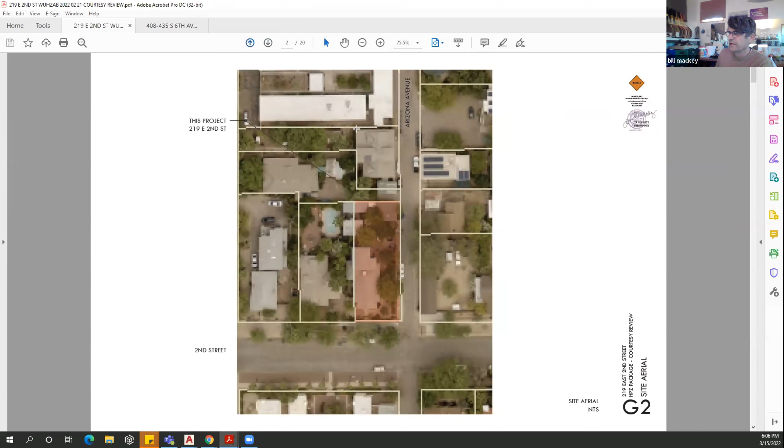But most important is what's going on in Arizona Avenue for this project, because the proposal will be facing Arizona Ave, just like many of the contributing and non-contributing structures facing Arizona Ave.

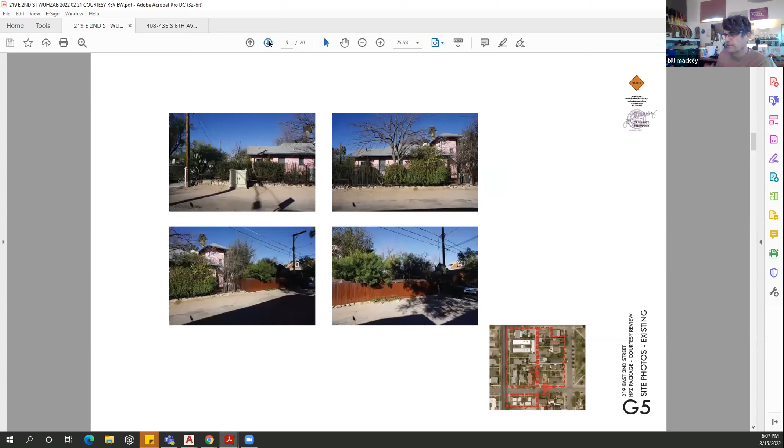Here's a photograph of the front of the house from 2nd Street. And then here's a photograph of it from the southeast, looking northwest and west. So you can see the front of the house here, and then the two-story addition that was done. When was that done, Jim?

1997, it did go through historic review. We were really, actually, historic review improved our design. So again, I appreciate this process and appreciate those of you who serve on this board. So the addition is actually vintage, it's like 25 years, right? Or so. Good point, so pushing 30.

So, and then here's the rusted metal fence that extends from kind of halfway in the property to the north. And in the shadows is a small one-story accessory dwelling unit. And that space there is where the Ramada will be located.

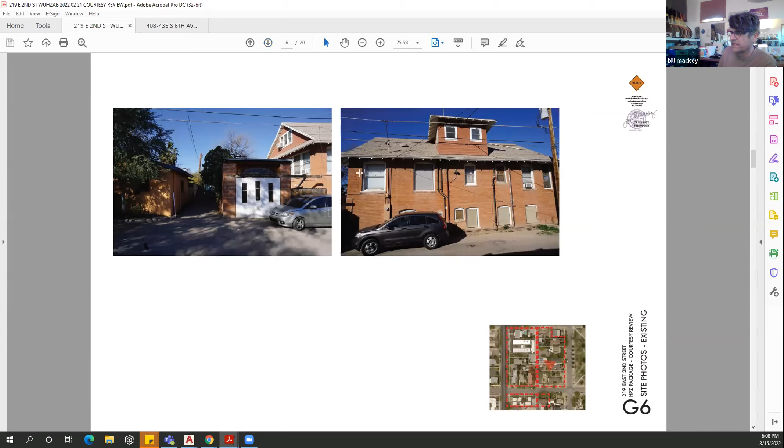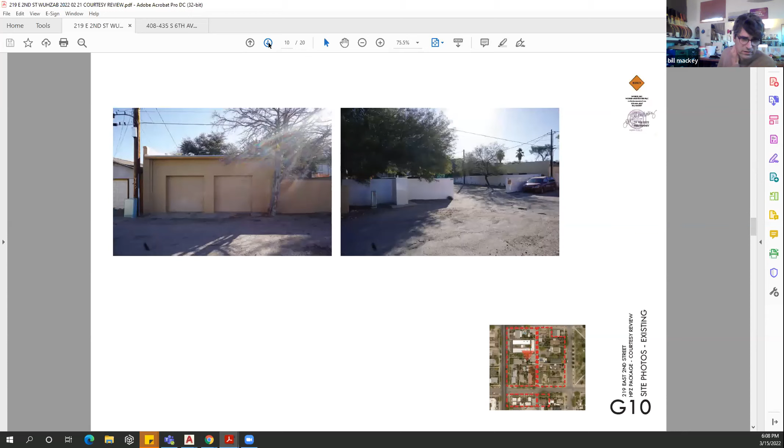And so then these are pictures of the development zone. There's a little garage building that's been modified. There's a two-story structure to the north. There's this carport, CMU and post and beam, low slung garage, and then a two-story building up at the corner. And then turning and facing east, we see a bunch of walls and garages. A lot of these are actually non-contributing, I believe, if we go back and look at the development zone. Right.

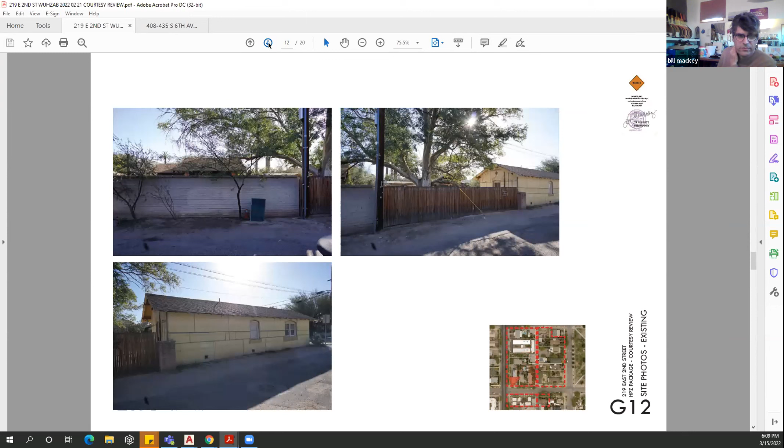And then there's the project I think you're going to be reviewing next, across Arizona Avenue from Jim's property. And then these are the houses and the properties that face Second Street within the development zone.

The property inventory, and this is the location from looking inside the property, looking north. Out here is Arizona Avenue, and this gravel area is where the proposed carport will be located. Behind that vegetation is the one-story accessory dwelling unit, and to the left is a one-story shed structure for working. In the back, you can see another one-story unit.

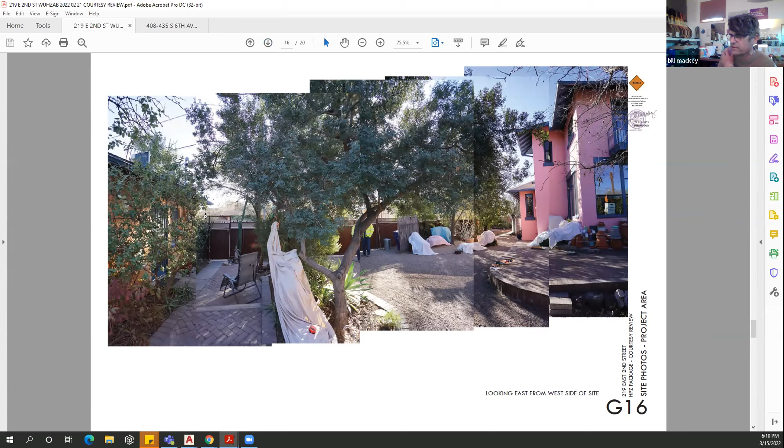This is looking west and south. The project area is located in this open gravel area. To the south is the landscaping, and south and west is the house - I'm sorry, I was looking east. To our left is the small accessory dwelling unit.

Here's the site plan, existing on the left, showing the location of the house and these accessory units. Right here will be the carport. We're going to modify a little bit of the brick patio that was built, and remove the existing gate and provide a new gate and a new overhead door for the Ramada.

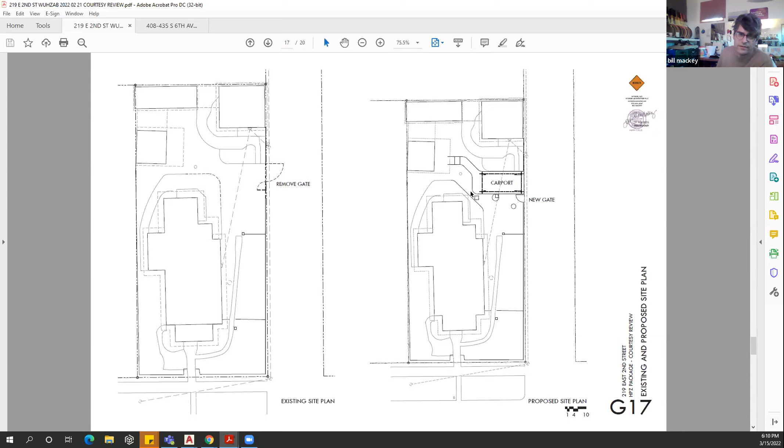This is a zoom in, and so there will be this Ramada here. It's about 20 feet by 8.5, 9 feet. There will be a pre-manufactured spiral stair on the south side of it. It'll be located 18 feet from the existing accessory building and about 5.5 feet from the main building.

The proposed elevations - it's steel. The columns will be, I think, a kind of tube - 4 square tubes, with beams in between them and the beams go on top. So it takes some of that arts and crafts porch architecture construction details and uses them with steel members instead of wood members.

You can see those are the columns, there's the beams. On top will be some joists with decking and a metal tube steel railing with horizontal pieces. We've been back and forth on whether it may be aircraft cable, may be 1/2-inch rod, may be 1/2-inch tube - not sure, but it'll be in the proportions shown here, maybe a 1x1 for the railing and a 1/2-inch or so for the pickets in a horizontal direction. The garage door will be similar to the fencing - a metal panel and frame with the metal panel inside the frame.

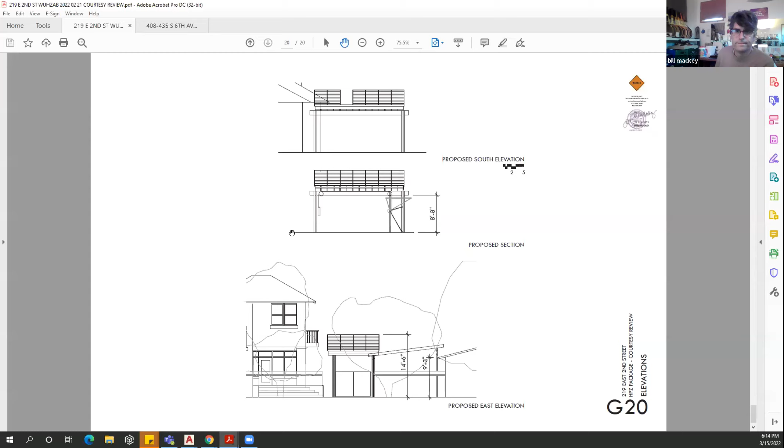Yeah. That's it. Okay, thank you very much. Let me get back on video again.

So you're coming to us for a courtesy review, I noticed on the agenda. I guess I'll open it up to the board. Any comments from board members?

I guess this is Damon. I just had one question, maybe two - I was curious what your thought process was on the horizontal features on the railing. Jim, you want to answer that, or you want me to answer it? Bill, you need to cue me when you want me to answer, and I will answer that.

Go for it, I've got 3 points I want to point out. One is, if you are on top of this Ramada, which is why we have the fence, we have the best views of the Tucson Mountains you can imagine. I have always tried to achieve those views in my buildings, and I have not succeeded until this opportunity. Likewise, we do have a view corridor of the Catalina Mountains, so we're looking forward to that.

With respect to the horizontal and vertical, quite frankly, we put in horizontal just to see whether or not you would comment and say you wanted it vertical. In my opinion, the last time I was before you was for a courtesy review for the iron fence, and I had horizontal panels and you guys recommended vertical, and I thought it was a good thing.

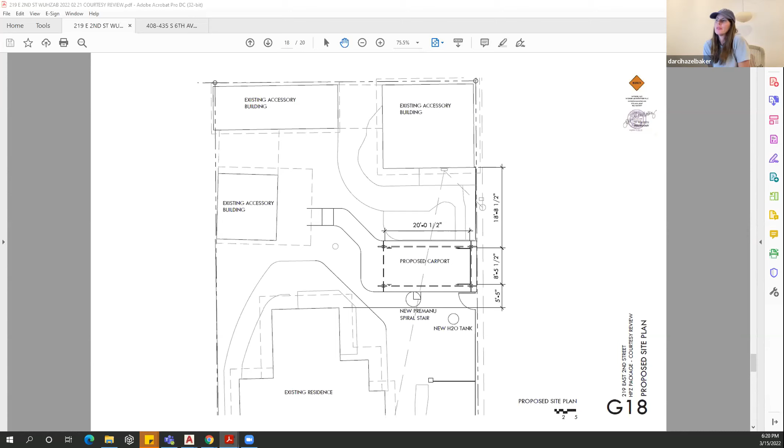I'm actually okay with the more horizontal, because I think, in reality, we're looking at this as a line drawing. I think those horizontals will probably fade to the background a little bit more, and it will just look like less verticals than if we were to go more vertical. I think vertical would probably be something that might be a little bit more prominent.

Also I kind of feel like it's a different thing, so in some ways I'm okay if it has a little bit of a different language, just because it's also a little bit higher up. You're never really going to see this thing like the east elevation, you'll never be far enough away to really look at it in this way. So I think if it was in a different place I'd probably have a different opinion, but since it's an alley with a short field of view, I'm okay with it.

Yeah, I'm kind of in the same place. And we have a lot of places where it doesn't matter. Bill, you're talking about those horizontals being, like you said, cable or some kind of steel cable. We have not made a final decision on what that material would be, but it would be less material than the vertical supports and the top horizontal support.

I'm not advocating that we do this, but I have a question for you, Bill. If you took those cables and oriented them vertically instead of horizontally, does that change the complexity of the project, or is it six of one, half dozen the other? It's probably more complex because you have to run more cables.

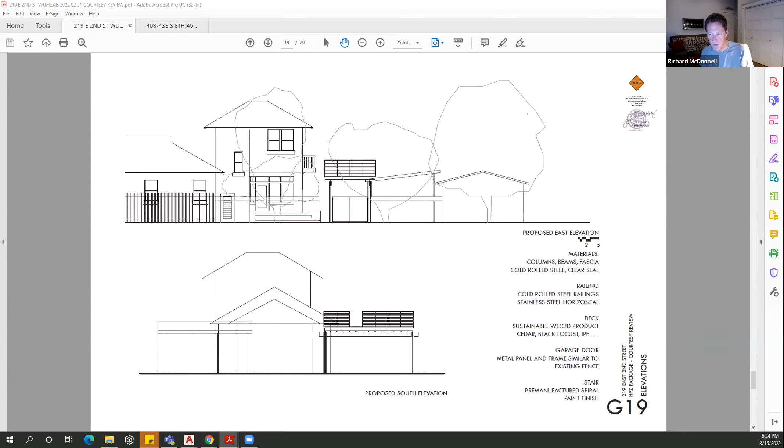One last call to the board for comment. Okay, hearing none, and given that it's a courtesy review, I think we're good.

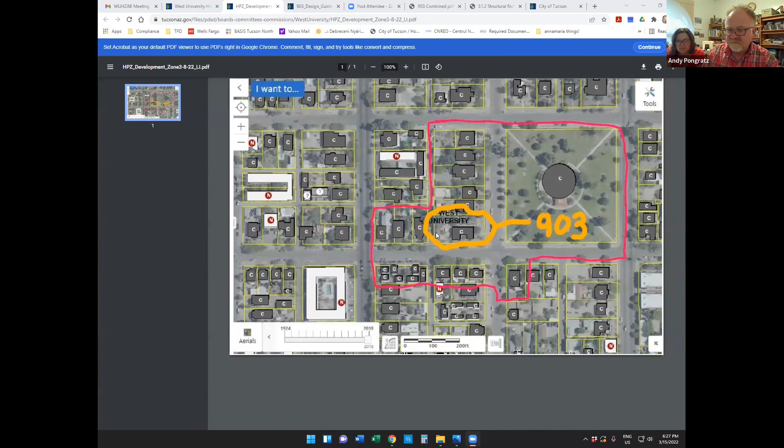Matt wanted me to go ahead and start with this, and then he wanted me to... I wonder if I can do that. How do I move it? Just move it.

It's just technology, guys. It's just amazing. There we go. All right. Okay.

Regarding the proposal, Michael asked me to tighten up the brief statement of the proposal, and we rewrote it, and it was available for you to look at. I think we had talked about things in detail before, and as Michael said, we should get into the meat and potatoes of what Matt has to present, because there are additions, decks, and ramadas that we need to talk about. Unless you want me to touch on anything else, Michael.

No, what you are presenting is this narrative, the board already has it. I don't think it would save us time going through this again, and the board already has it. If they have any specific question, they will ask you during the review. Okay, so just go straight to the plans. All right, we're right into the plans then.

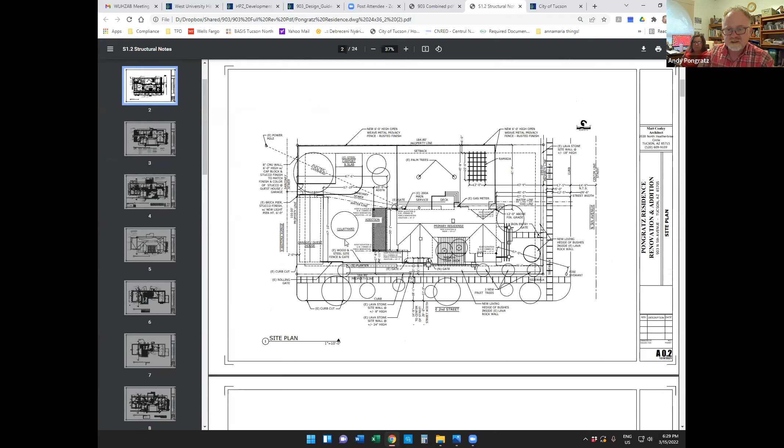So Matt, take it away. This is Matt Conley. So Andy, we can go to the next sheet, I think, if you want to do that.

So the proposal that we're putting together, what we're asking to do is to put an addition. Andy, since you've got control of the screen, identify where the addition is on the drawings. So the addition is on the west side of the existing home.

It's a craftsman style home, and the portion of the building we're removing, we have about 10 feet there, 12 feet if you look at the overhang we're adding to the west of the building. 6 feet of that is currently a sleeping porch or open screen porch in very poor repair. So we will be removing that and putting a full 10-foot addition on the west side of the house.

That addition will have a craft room, laundry room, an office, and a storage area off of the hall. There's a hall that runs down the center of the house, essentially below the ridge of the house, just above the primary residence.

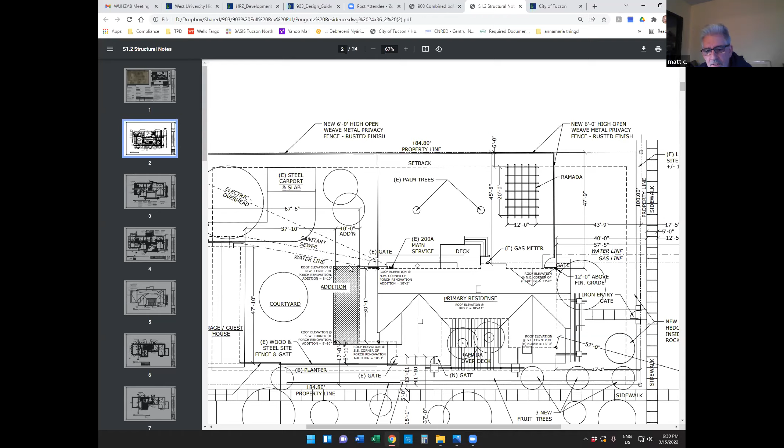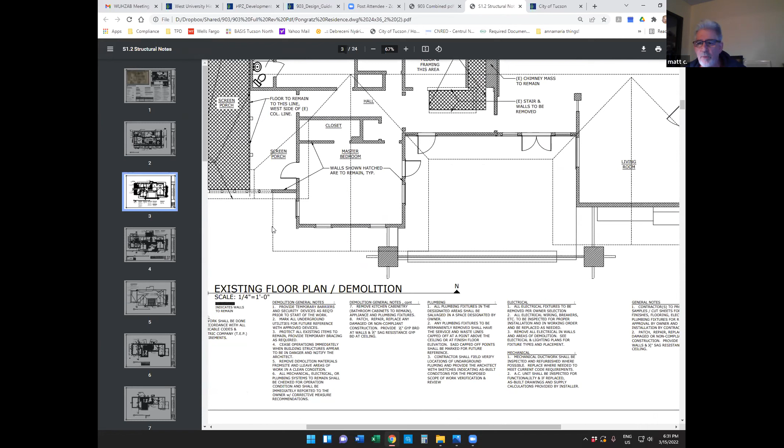That hall will continue to the new addition area you can see identified as screen porch, so we'll be taking that off. We're also opening up the stair down to the basement - there's a small basement area, and we're opening that up to get a code-worthy stair into the basement area.

So I guess, Andy, you can scroll to the next drawing. There we go. Okay, so the addition you can see here, it's going to be a crafts room. There's a bedroom in the corner and then an office we're putting in, kind of squeezed between the bedroom and the walk-in closet.

That was part of the screen porch, and that's the area that's going to be remaining. We're turning that into a larger walk-in closet for the master bedroom.

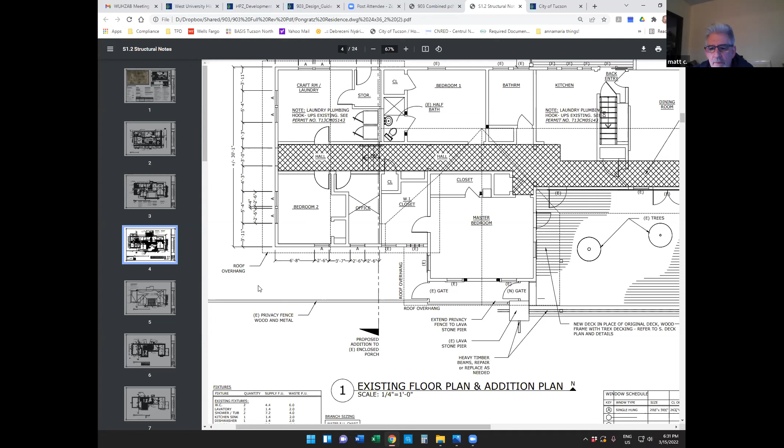The other thing, can you pan to the right a little bit? I guess my right. So the other thing we are proposing to do is reinstate a deck area and ramada that was cut between the two wings of the house, the master bedroom wing and the living room wing. There had been a porch there, and on some photographs Andy can show you later,

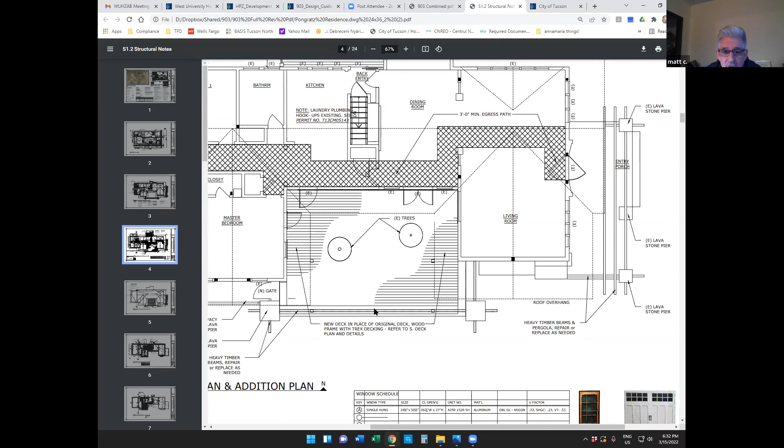you can still see the location where the ramada framing was attached to the east wall of the master bedroom, the east exterior wall of the master bedroom. And then we're putting a deck underneath that.

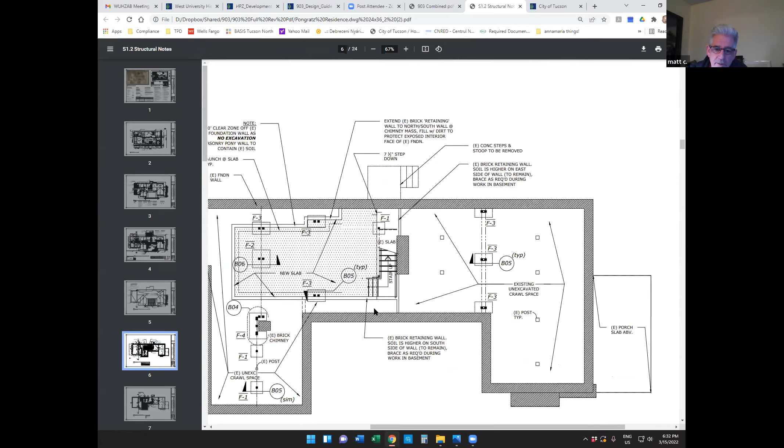There was a question at the last presentation Andy had done about this ramada. We have designed it so that the portion - Andy, go back please. Thank you. So the south portion of the ramada, you can see between the two large piers on the south side are lava stone piers that are existing, and you can still see the rafter tails coming out of the end of those from the original ramada that was there.

We will be restoring the wood that we can restore and replacing the wood that needs to be replaced in those locations. The second primary beam position as you move north - yes, thank you, Andy - is a beam spanning from wall to wall within that courtyard space or deck space to pick up a second beam.

And then we're going to tie frame on top of that beam between the two lava stone piers, because that was in fact the way it had been framed initially, so that it had the rafter tails that come out south of that primary beam. So it was really a matter of not bringing our ramada members into the roof finish itself, but rather tucking them underneath the eave and bringing them to the south wall of the house.

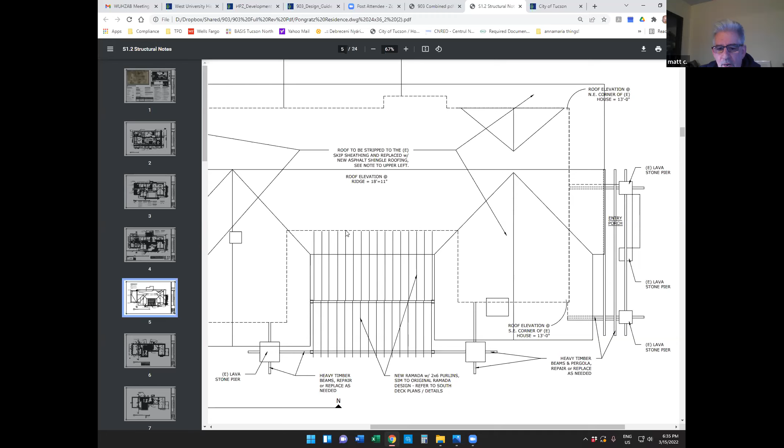And then, Andy, if you could pan north. We're also proposing to put a deck in off of the kitchen on the north face of the house that faces into the side yard of the house, which opens up to Fifth.

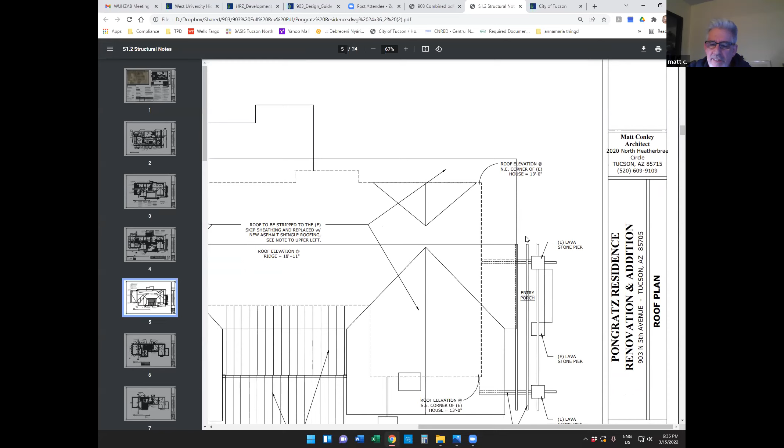Would you like me to go to elevations? No, not quite yet. You'll also see at the entry that we're going to be refurbishing the beams and that sort of ramada entry cover as well. That is a reasonably intact portion of the house, and I think with some minor repairs, we'll be able to get that taken care of without having to replace all of the wood members in that case.

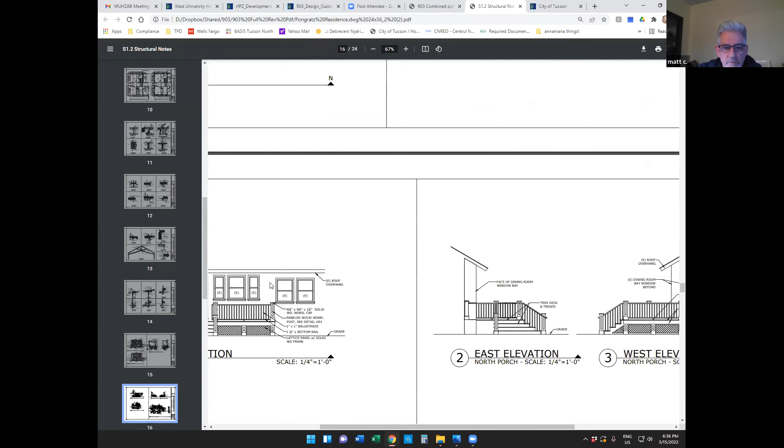Let's see. Yeah, Andy, why don't you go ahead and go to the elevations. Thank you. Scroll to your left, Andy.

So this is the deck here that's off of the kitchen. And it provides an outdoor seating place off of the kitchen, a place for the family to gather when they're having activities in their, essentially their side yard is their backyard. The yard to the west of the property, west of the addition, a lot of that is vehicular and space between the garage guest house.

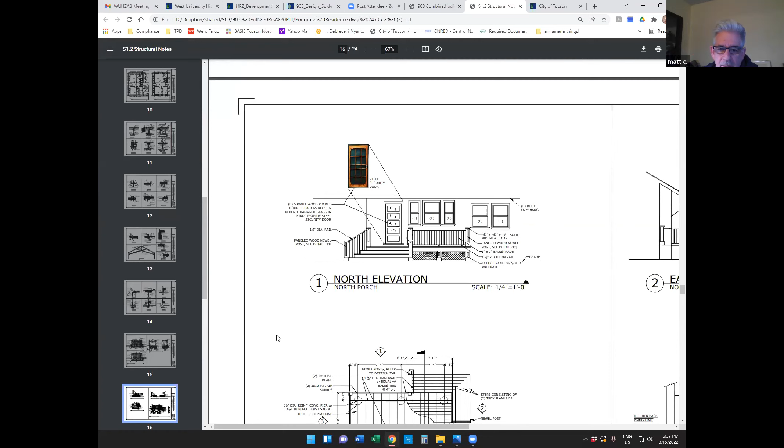So we've designed this in a style that is consistent with the arts and crafts style of the architecture itself. The steps open down both to the north and to the east off of the porch. And this porch is floating off of the house.

So we have a paired series of concrete piers that support that porch so that we don't have to bring any kind of structural members into and bear upon the existing lava stone foundation wall.

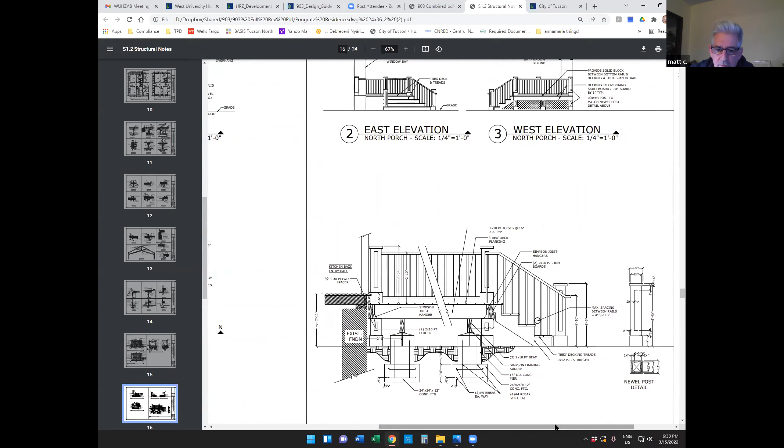So Matt, could you go- or Andy, I guess, go back to your right? All the way. Yep, there you go. Thank you. Right there, that's perfect. So, Mr. McDonald, I'm trying to- you've got a lot of things on this particular drawing that are all labeled E.

And the windows, let me just start with the windows. The windows, you're just refurbishing the existing windows, right? You're not changing anything in the existing house?

We have been fortunate enough to be able to refurbish all of the windows. Andy has replaced glass in many places in those windows, but he's looked for the kind of leaded glass that is consistent with the time frame of the house. So they are being refurbished, or where trim needs to be replaced, it's being replaced in kind. So the detailing will not be altered.

The door is a wooden door that has glass panels in it, and it too is being refurbished so that we're not buying a new door. We are proposing to put a steel security door on that door location.

There are two other locations that Andy and Andrea would like to put a security door. We have later in the presentation a better photograph of that. And Andy has actually propped an example of that door up into those three locations, so you can see literally what it would look like in the three entry places that we're proposing to use that.

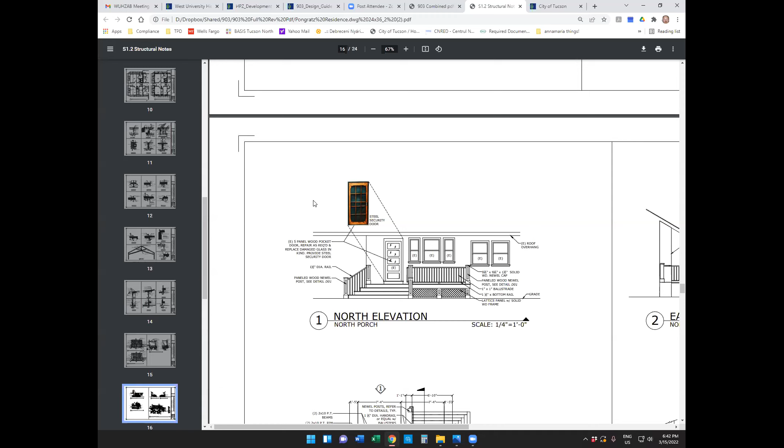So Matt, let's go back to the door. The one you're showing on the diagram here, it looks like 5 straight panels, but this brown one you're showing here, are they divided panels? Andy, you can speak more accurately to that. What exactly was the question, Matt? Whether the panels on the security door - it's divided into 6 lights above, an intermediate set of smaller lights, and then 6 below - are those true divided? In other words, does the sticking work?

Is there a panel in between each one of those individually, or is it actually a wooden overlay? It's kind of the neatest thing - it's actually real wood on top of a security door. And the neat thing is, Matt, should we go to the pictures real quick, just so we can see?

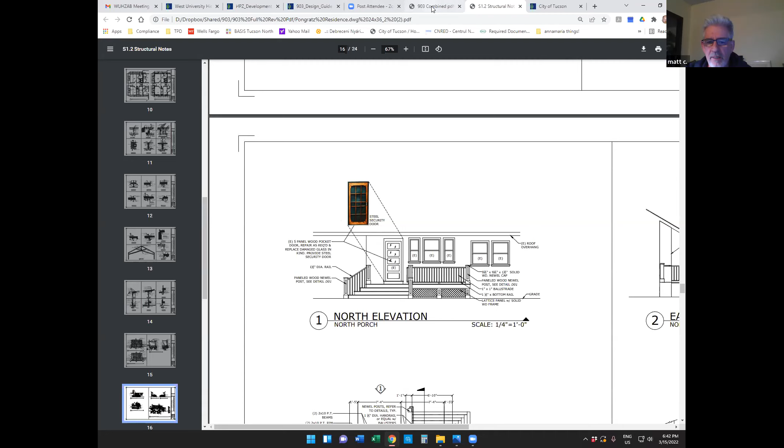Sure. And Andy, what Michael is asking is, with the security screen behind the door, behind the framing, is that a single panel of screening, or are they individual panels within each one of the openings? So we're talking about the actual security screening portion of the door - is that a single panel behind? It is, yes, that's actually just a regular security door.

And what the company WoodGuard has done is they went ahead and put a wood overlay, and you can actually see from different pictures - it's really kind of neat, and something I think the board should see many times in the future to help folks protect their homes. You can see how the beautiful detail of the wood actually goes exactly with the existing house. It's just fantastic - I don't think there's anything that could have been any closer than this security door.

What is there though, is that glass? I can't tell from the image. It's actual screen. Okay, so the gray there is the actual security door. And Damon, you can actually see the molding around that fits right into the trim. All I did was take the screen door I had and propped it up.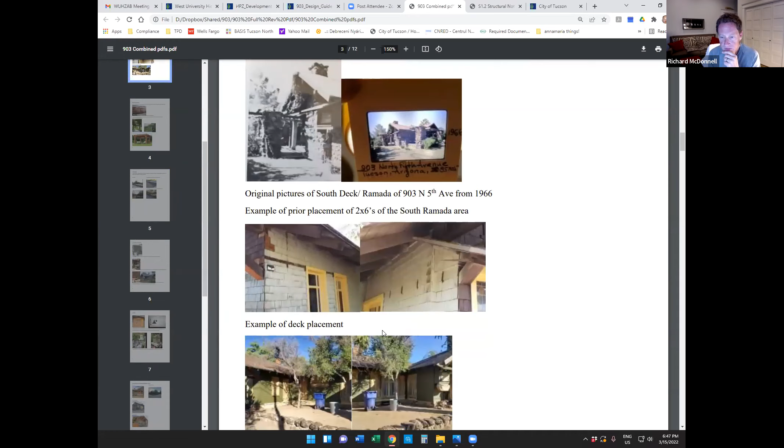So comments with respect to these doors, given that the wood we see in that picture is an overlay over a perforated screen - does that manufacturer allow different mullion designs? Do you know, Andy? Rick, I was very fortunate to find this on Craigslist and find the actual manufacturer. I looked on their website, and this is all they offer regarding an overlay in that kind of design. The exact measurement of the wood going across is the exact measurement of all the windows throughout the whole house, not just here. It's the exact same size - talking about the thickness of the mullions. Yeah, thickness, yes.

I was going to ask if you could, going back to the deck on the north side, walk through some of the details and talk about how you're connecting to the design of the rest of the house.

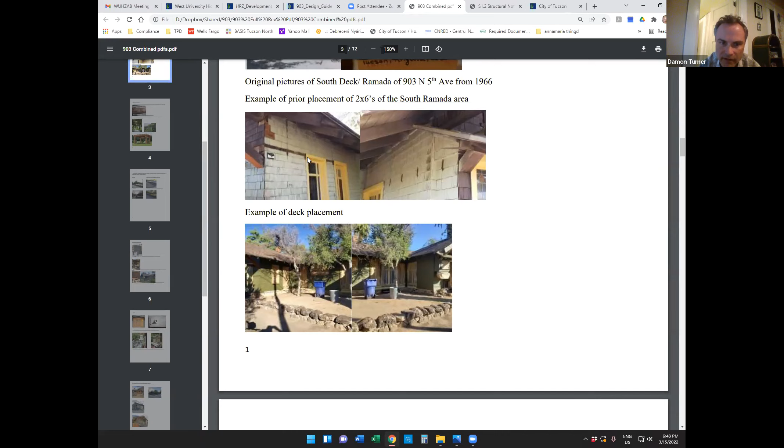I think if you go back to that elevation view - there you go. How are we connecting to the house? Not physically, I'm asking about architectural design. Aesthetically, architecturally - Andy, this is actually a section, so it shows the newel post. The detailing: we have a wood balustrade with a top wood handrail and a kick rail at the bottom. These are basically a flat recessed panel with a built-up plinth, and then the fascia across the skirt between the deck material and a lattice infill panel to close off the area underneath the deck, both from critters and so it's not an unsightly dirt area. But it's all wood. It will be stained and finished in keeping with the color palette we're working with on the outside of the house currently.

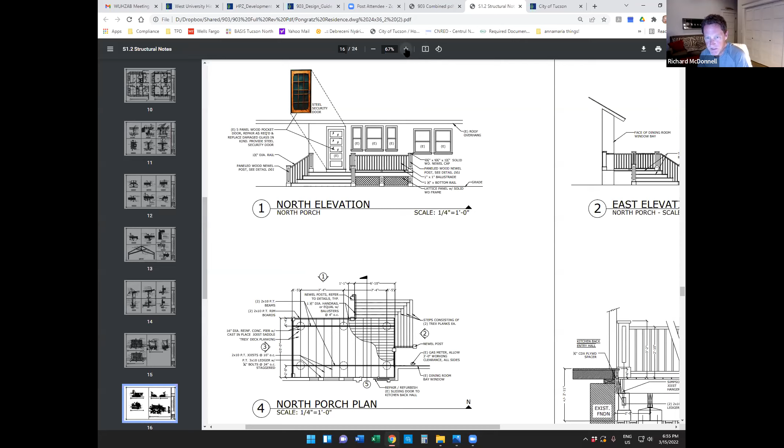Andy, we're not talking about whether putting a deck is a good idea or not, or whether having the functionality you're looking at is fine. It's just that the specific detailing of things like the posts needs to be consistent with either the intention of the house or the intention of the neighborhood, the specific development zone around your house. It's not that we don't want you to have a deck. It's that if you do have the deck, we want it to look like something in the development zone.

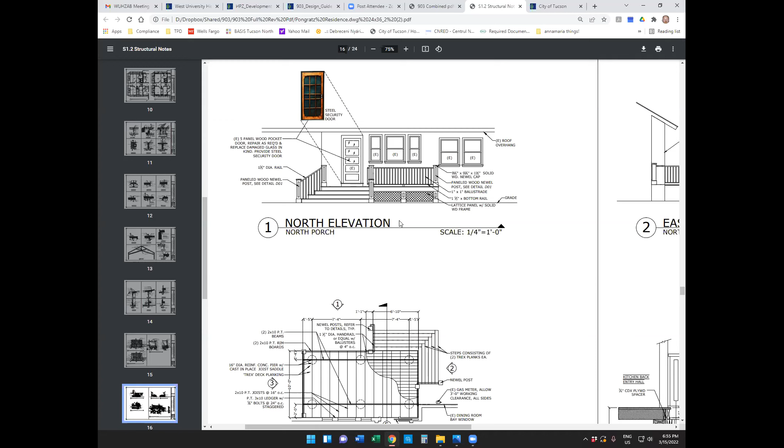I think all the other decks that I've seen are just very, very simple. The very few that have been around. Right, but that's actually part of the intention. So Matt, I'm kind of looking to you a little bit too. Do you follow what we're asking? I do, yes. And so within that context...

Let's see, I think we could go ahead and just square up and not have a recessed panel there. We can just have a solid panel going across. Right, we were talking about a home in Savannah, Georgia, that would make a lot of sense, but it's not. I think what we're asking is, is it really consistent with the aesthetic we see in the development zone for these kinds of homes? We're not questioning the utility of the deck.

So following that thinking, would replacing... because somehow we've got to support the deck itself, I'm wondering if replacing the piers with stone, while still maintaining the gap, and a wood framing across the top, would be more acceptable within the context of the development zone. Given that question, I'll make a point of driving through all of the blocks to see kind of what the general context is for other decks.

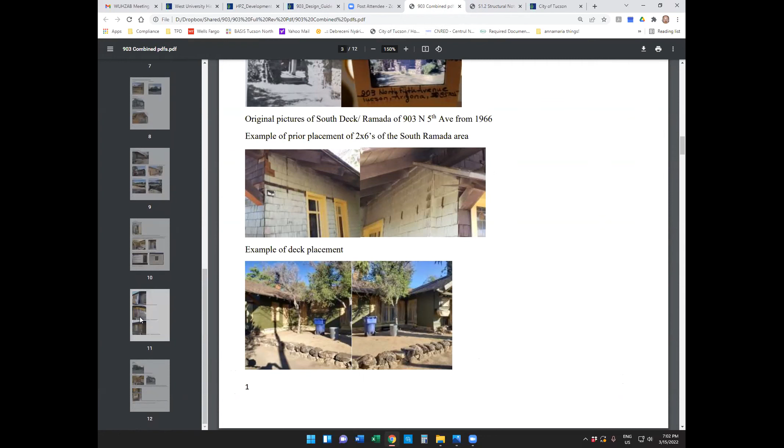I'm just looking to see what kind of guidance we give in the design guide. I think it's as good as we can hope for. That's a challenging thing to be searching for to fit a historic home. I think it's definitely one of the best I've seen in the neighborhood. Thank you, yeah, and I think it's pretty consistent with our guidelines.

Okay, really quick—do we need to make any mini motions or anything, or do we want to just make note of some things and then make one motion at the end? One motion at the end.

One of the items would be obviously the north patio consistency. I just want to make a little note so we don't forget stuff. Thank you, Darcy. Maybe what the board can do, Mr. Chair, since this will become a little too much at the end—maybe once you get to a section and discuss it until satisfied, you can make a motion for that section instead of waiting until the end, because it becomes one long convoluted motion.

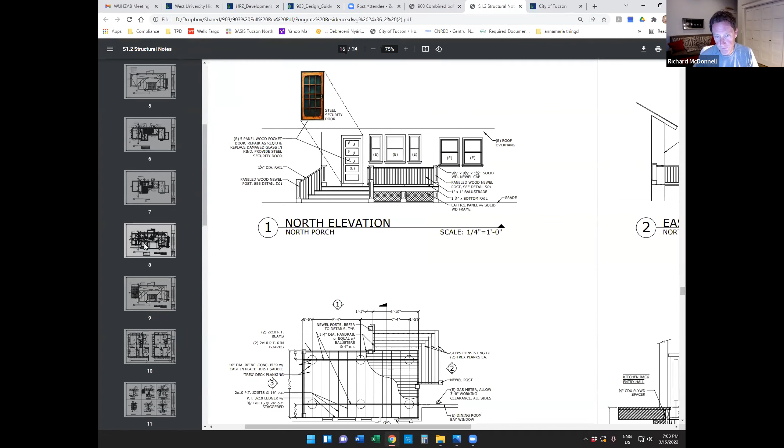So if I remember correctly, looking at the drawings, we have this patio up on the north side of the house. We have a ramada on the south side of the house. We have an addition on the west side of the house and a ramada somewhere out in the yard, and then the garage and an entry update.

So we probably should do it in pieces. I think Darcy's got a good point. So with respect to the north patio...

I think in general, I'm just gonna say a couple comments and then ask for a motion. In general, we're good with what we see, except that I think we need to see the detail of the posts and balusters updated to be more consistent with the aesthetic and flow of the house. The screen door, the security door, we're okay with. You guys are keeping the windows as is. Generally speaking, the footprint of the patio, I think we're okay with.

I'm just talking out loud here. So if we just say, do we have a motion on the north porch or north patio, whatever it's called in the elevation, that we just capture our thoughts on? I think we need to see another drawing, right? I don't think we can really make a motion to.

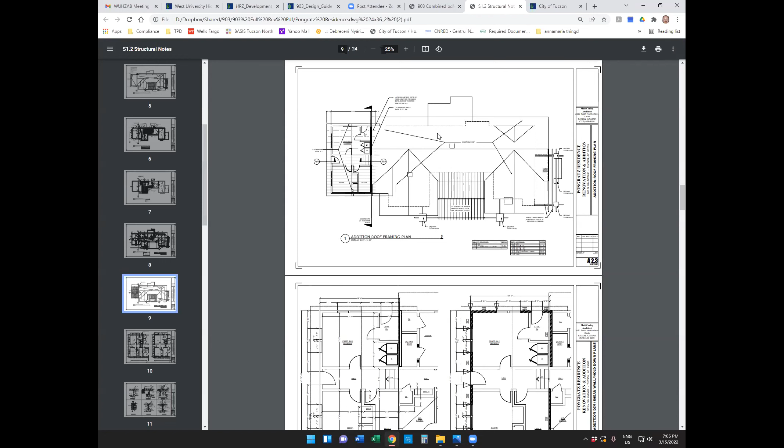Do we feel comfortable approving anything right now? No, I'm not saying we approve. I'm actually just trying to capture the comments. So the motion I'm asking for is, do we have specific guidance we want to give them as to what we want to see next time?

It's also possible, and we've done in the past, that we can approve certain aspects with the caveat that we see an updated elevation or whatnot that we can all then vote on after the fact. We've done that. We did that last meeting, in fact.

Yeah, so I can try a motion and we'll see if it works. This is Damon. I motion that if anybody wants to stop me, now's your chance. I motion that we provide approval for the footprint of the deck on the north side of the house, the use of the security door, and of course the reuse of the existing door and windows. And I'd like to see more design details before we approve the rest of the deck.

Sorry to cut off. Are we okay with the Trex? We agreed that we were, right? I think that should maybe be part of that. That's a good point, thank you. Let me modify my motion to include that we're good with the Trex.

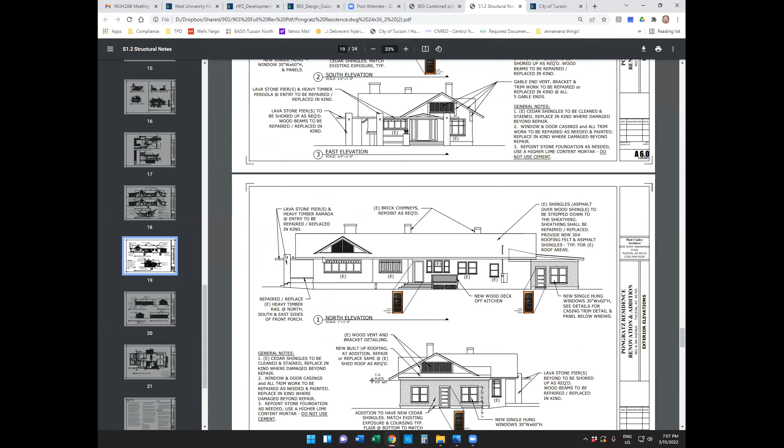Betsy Besnick, how do you vote? Aye. All right, Rachel Sarah, how do you vote? Aye. Damon Turner, how do you vote? Aye. And this is Rick McDonald, I vote aye, so that motion passes unanimously.

Okay, one down. Andy, shall we look at the south deck? Sure, absolutely.

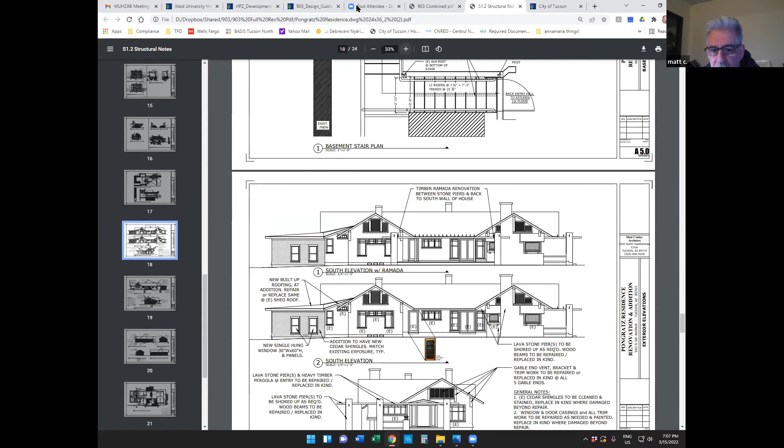Okay, so the top two elevations show the south elevation of the house. The top elevation shows the Ramada. You can see the stickwork of the Ramada itself, spanning the beam between the two lava stone piers, with their rafter tails coming out both to the east and to the west. You see the beam that's running across and spanning between the middle of those. And so that will be the primary beam that then is supporting the 2x6s, which are going to be the stick work for the Ramada itself.

You can see beyond that a pair of posts there. Those two posts will be supporting the second beam, or the next beam to the north, that again the stick work for the Ramada will be true-framed on top of. Beyond that, the stick work for the Ramada will be flush framed to the beam and will pass underneath the eave as you see in the second elevation, the south elevation of the house. It will come up short of the south wall itself to the dining room.

So what's supporting the beam that's further north? I think I might see maybe two 4x4 posts or something. Yeah, they're 6x6 posts, by 6. And the rafters going north-south tie into the house, the south side of the house under the eave. That's correct, yeah. It's hard to see on this drawing, but okay.

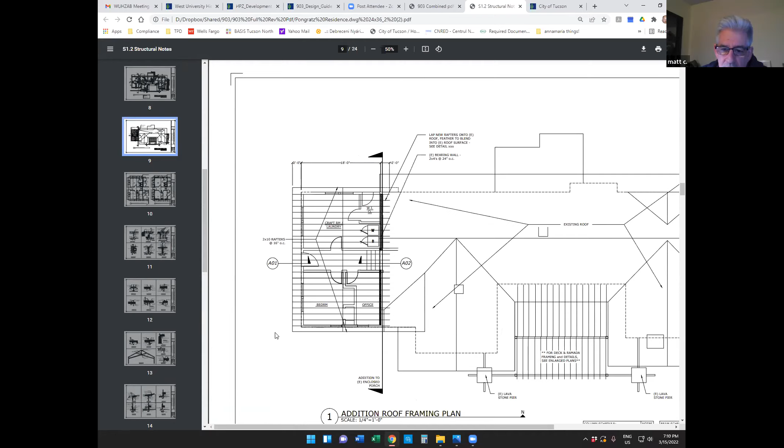And the rafters are 2x8s, 2x6s? 2x6s, 2x6s, okay. And no solid covering, it's just the rafters like a pergola? No, it's just open pergola.

Yeah, okay. And then you'll see, Andy, can you scroll to your right just a little bit there?

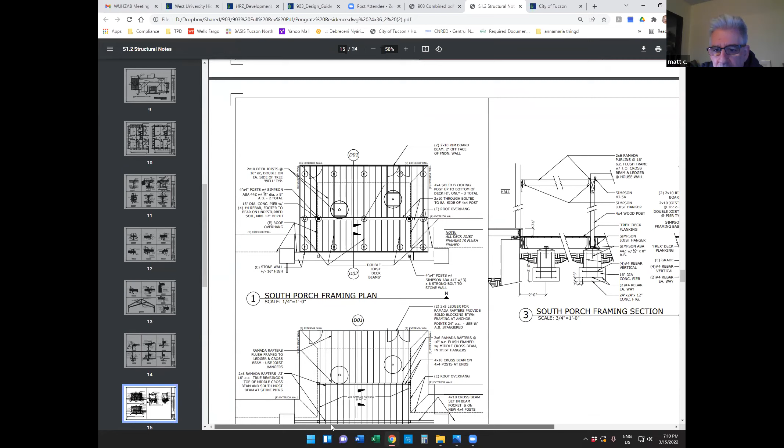The deck itself is a step down from the floor level of the house, and it aligns with the top of the lava stone pier. That eliminates the need for a handrail, since the lava stone piers are only 16 inches above grade. So that eliminates that clutter, if you will. There's no evidence in any photographs or renderings of the house that there was a handrail there. And it's Trex decking again, yes.

This was the question from before regarding how it goes from the house to the post, to the beam, and then how the rafters sit on top to continue to the stone work.

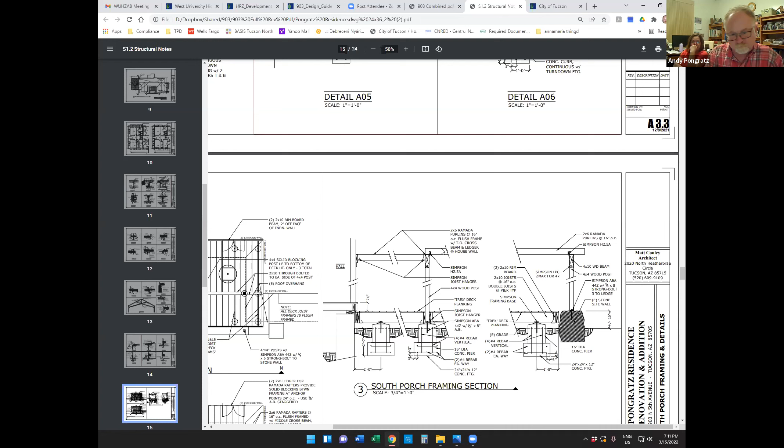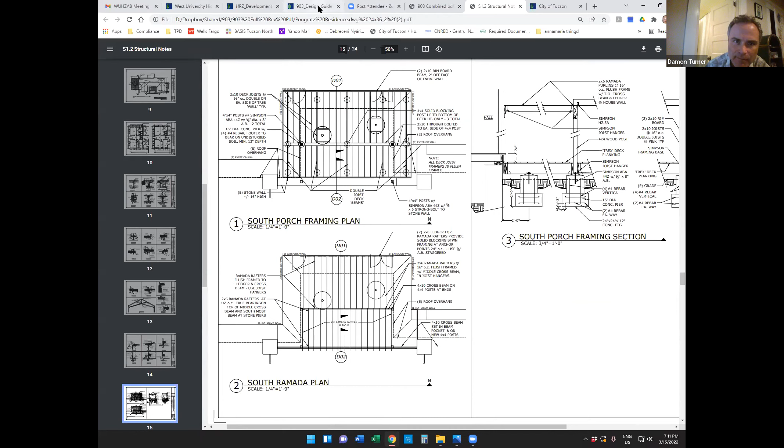I have a stylistic question for the other architects here. One of the things I see when I look at pergola or Ramada styles in this architectural style is a lot of big beams, which I think is achieved here. I also see a lot of knee braces, or waterfall style braces, and some interesting joinery. I'm curious if you guys considered any of that, or if we as a board think you should introduce some of those elements to better relate to the style of the house, or what people's thoughts are.

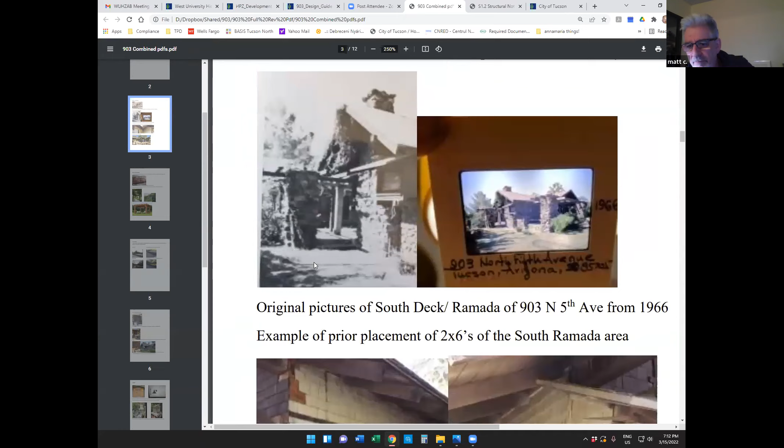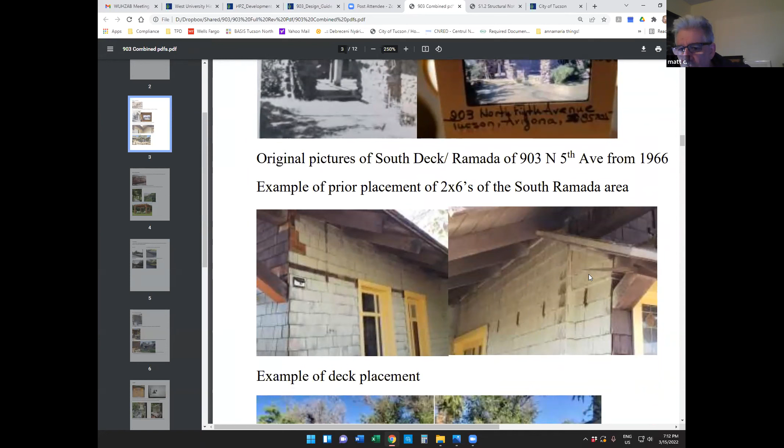To answer the question, we had not considered that. The photograph we have showing that Ramada, which is up on the screen now, did not have any of those diagonal braces kicking back to the house. Those diagonal braces are seen at the gable ends of the master bedroom, at the gable end of the living room, and again at the gable end of the living room at the entryway. Those have very strong diagonal brace supports, but there wasn't evidence of that kind of secondary support at the Ramada, so we had not imagined introducing that.

I was actually asking about where the new 6x6 posts you're putting in are, the ones supporting that secondary beam. I couldn't quite tell in that picture what I was looking at there.

So, Damon, just so you know, the edge of the roof line comes about 4 feet off of the house itself, on both sides as well as on the north side of that deck. So we're not actually touching the house, we're keeping off of it. The concrete footer will be here for the post to go straight up, approximately in this area, so it's just about even. As we're bringing the rafters out, we'll have a supporting beam right here, and from there it would continue out to the stone pillars.

What I was trying to understand was how those 6x6 posts in the footer, where you're pointing, join up with the beam sitting on top of it, and what the original construction was.

Not sure what the original construction was at those joints. We are calling for standard lumber attachments to be used in those locations.

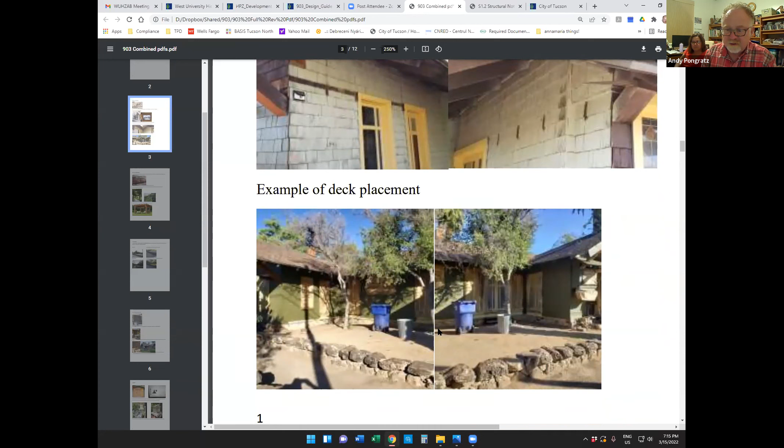So our focus is to be able to keep the availability of seeing out. That's why we're utilizing the span between the two pillars, to have a nice view without anything blocking. And it's interesting that they had all that wood in the center blocking their view, but it all fell down anyway.

This is Rachel Sarah. It's kind of a happy accident that my computer wasn't working and I had to use my phone, because I'm able to zoom in quite a bit. It looks like that skinnier post behind the clad one actually does have the knee braces that Damon's talking about.

I think that was more the question: do you plan on just doing a single straight post, or do you plan on doing some knee braces? The initial design was just a post.

Yeah, Rachel, I'm impressed that you can see that. I can't tell that from my screen. Well, I can zoom in a lot on my phone. That's what I'm saying, it's actually nice having my phone instead of the computer screen. It's almost completely pixelated, but you can actually see that it has that little knee kick brace.

I think there's precedence to go either way here, and I don't really feel strongly either way. Can you go back to an elevation of the whole house with that, Ramada?

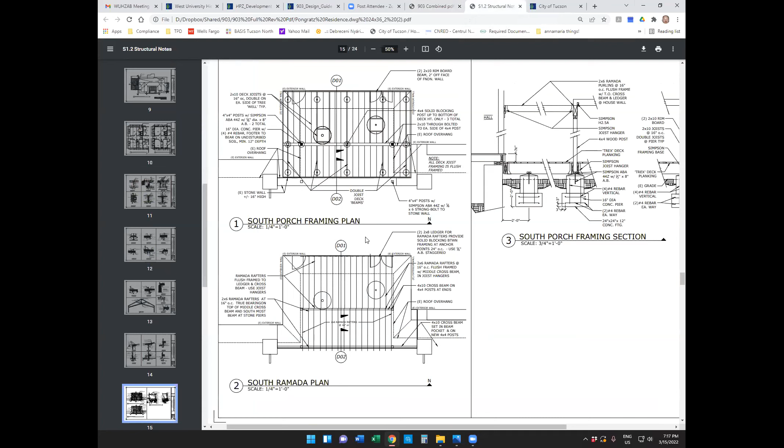A side elevation, yes, the whole house. Yeah, so we can just see how the geometries all work together. Is that right there?

I don't mind it not having the little knee braces. I think it's kind of emphasizing more the stone work, which I think is kind of nice, and those elements can become secondary. Just my opinion on that.

Matt, those posts are 4x4, is that right? I believe that's correct, yeah.

All right, well, so to the other board members, Damon, Darcy, do you have any hard feelings about those 4x4 posts?

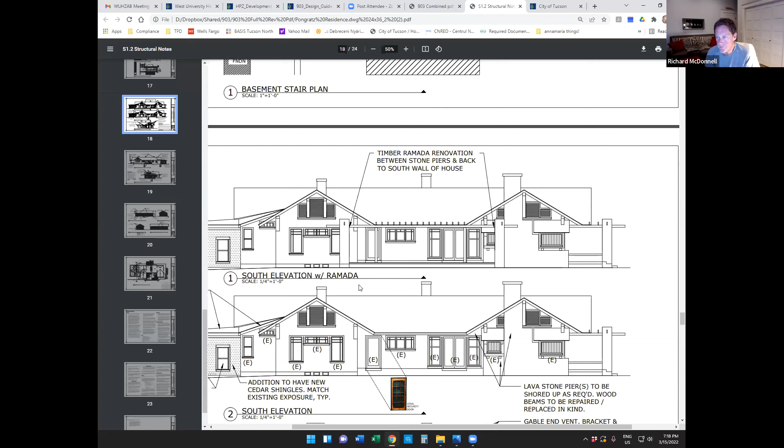No, I think my comment is just that I tend to agree with Rachel Sarah, and with the detailing of it, I could kind of go either way with the knee bracing. I do agree that when you look at the elevation, the framing and detailing of the Ramada is sort of a thinner line, with the posts being the more emphasized or hierarchical element. I think it's a sort of a small player, those knee braces, in this particular elevation.

Damon? I guess I don't necessarily have a strong opinion about it. I kind of wanted the applicant to make a case that they considered that when thinking through the design. I think part of the intent is for them to research what they believe the original construction was, and then try to restore it to that or explain why they're not doing that. I was trying to pull some of that out. I don't actually have a strong opinion on it.

I think, Damon, in answer to that, I simply had not been able to identify that there were knee braces on those posts. So it wasn't considered only because I had not seen those when I was looking at that historical photograph. Fair enough.

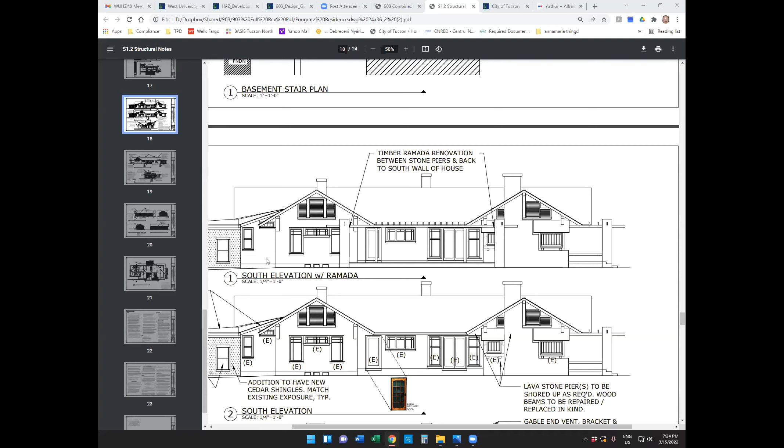So Betsy Besnick, how do you vote? Aye. Rachel Sarah, how do you vote? Aye. Darcy Hazelbaker, how do you vote? Aye. Damon Turner, how do you vote? Aye. This is Rick McDonnell, I vote aye. So that is unanimously approved.

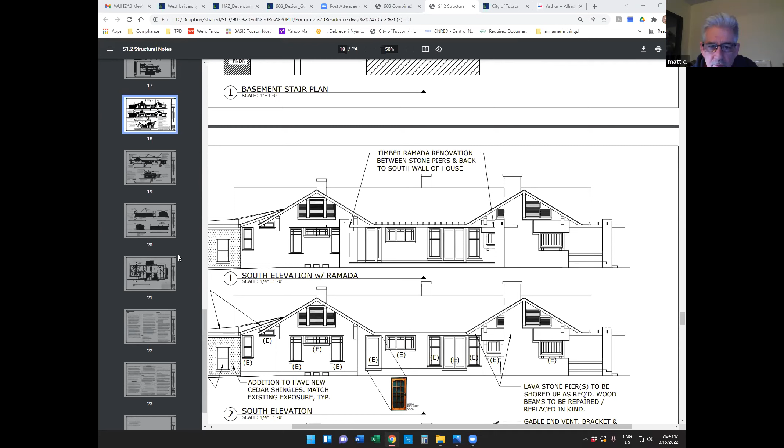Okay, Andy, let's go ahead and scroll around to the front elevation. On the elevation you're seeing on the page now, whoops, which one? Let's go back to what you were looking at before. Sorry. Okay, and then scroll so that the entry area is to the right, no, up and to the right. Okay, there you go.

So you can see here on the right portion, you have the fireplace and the lava stone projection here on the south end of the living room, with the projecting bay windows flanking the fireplace. To the right of that, you can see a primary wood beam coming out to that solo lava stone pier. It has its twin on the opposite side of the porch, but those are the only two lava stone full height piers on that front elevation piece. It has its rafter tail in the same kind of detailing as the two lava stone piers, the south elevation of the deck, and then the horizontal ramada members running north-south that you can see there that Andy's pointing at.

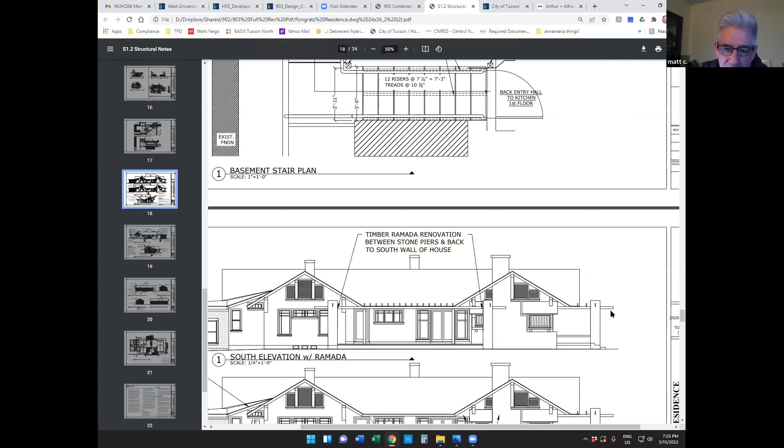The rafter tail coming out of the south pier is going to have to be refurbished. No, the one coming out of south, that's east - the one that's towards us has some damage on it, and that's going to have to be repaired. I don't think it'll have to be replaced in total, but it will need to be repaired. You can also see the horizontal rail for the front porch. There we go, thank you, Andy.

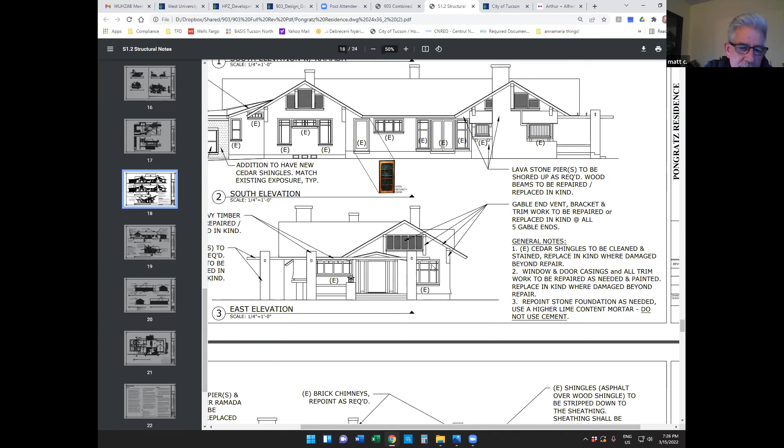So Andy, let's scroll down and look at the front elevation of the house. This is the front elevation. All of the members we see between the lava stone piers, the one on the far left is actually the corner pier of the deck that we were looking at in the south elevation. So you see the two full piers and then a short corner pier on the left-hand side of the steps coming up onto the porch. But all of the wood members, both the wood members of the ramada itself and the wood members in the gable end, beyond the diagonal braces for the brackets coming out to support the deep overhang, are all original and require some maintenance, but by and large are in adequate shape to keep.

And then the main entry door is a 4-foot wide entry door with a very nice wood surround on it, which Andy has actually stripped the finish off of and restored to its original wood. And that also has a screen door that I believe you're repairing, aren't you, Andy? Yes, doing that. Yeah, and that gives you a sense of the heavier wood members that are part of that front entry porch.

The two members that are coming out of the page towards us are helping to support the ramada that runs north-south.

Matt, if we could, can we go back to the addition? That's probably the third and largest thing that we need to go ahead and cover. Let's take a look at each one of the components.

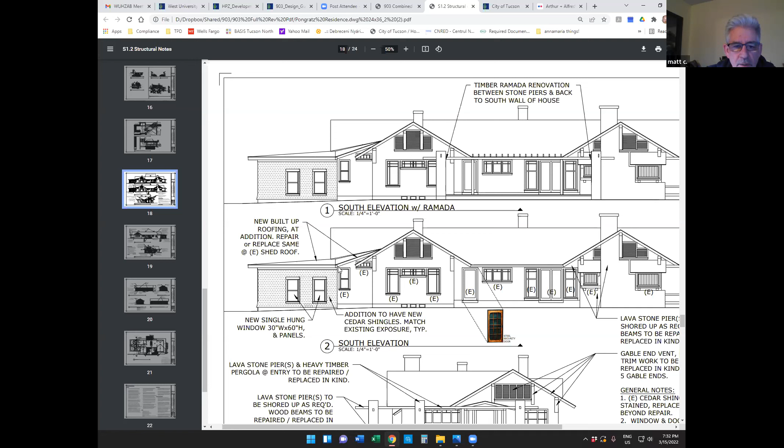What you're looking at here in the small triangle is the cricket, if you will, that's going to feather up to the point that it intersects with the existing roof so that we get positive water drainage off of the roof there. Having a hard time visualizing from this elevation. I know you've got other views.

So do you want to go to the west elevation just real quick? I think you just passed it. Yeah, oh nope, nope, this one, nope. The west elevation, no, that's the front elevation, the east elevation, north. There you go. Right there, stop. Went too far, not too far, scroll down again a little bit. There, that elevation, thank you, Andy, sorry about that.

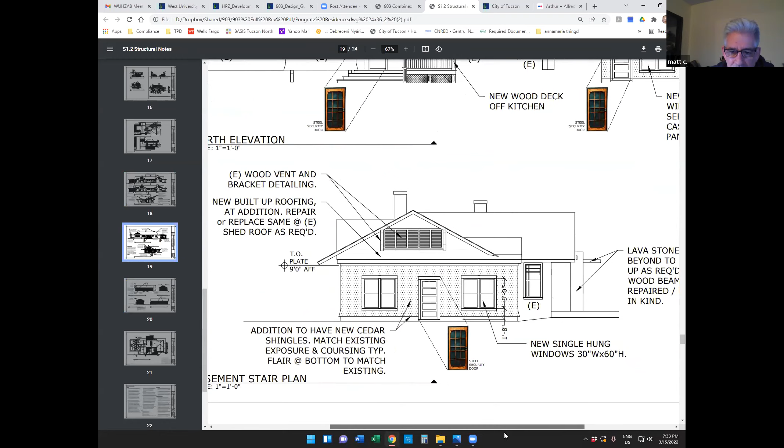Not a worry. So the existing sleeping porch, are you demoing that and replacing it? Yes, half of it, because it's in very poor repair. The planking in the floor is all torn up, the siding is in very bad repair. All right, and then you're changing the footprint.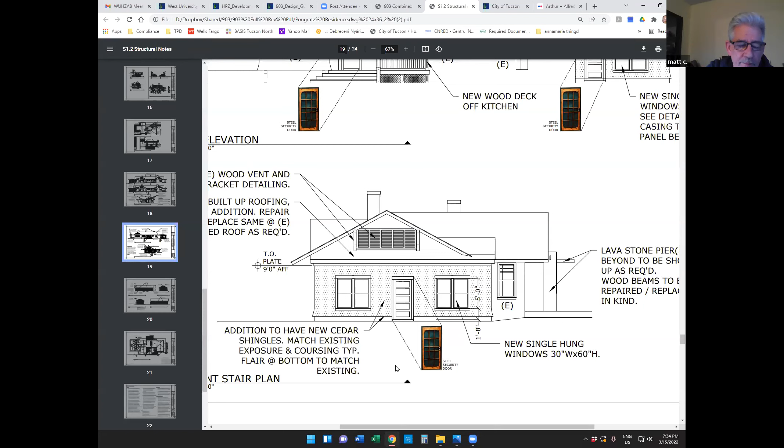I'm sorry, and you're changing the footprint, you're making it a little bit bigger. We're pushing it out another 6 or 10 feet. Oh, you're pushing it out another 10 feet. Correct. Okay, and we're siding it with cedar shingle siding, the coursing and exposure of which is going to match the existing house.

And we're replicating the flare of the base of the siding, which is the detail that the existing house has as well. The windows we're going to be working with are going to be white aluminum windows.

They're single hung windows. We chose aluminum as the material for exactly the reasons, Rick, that you had mentioned earlier, that vinyl cladding is not going to hold up over time at all.

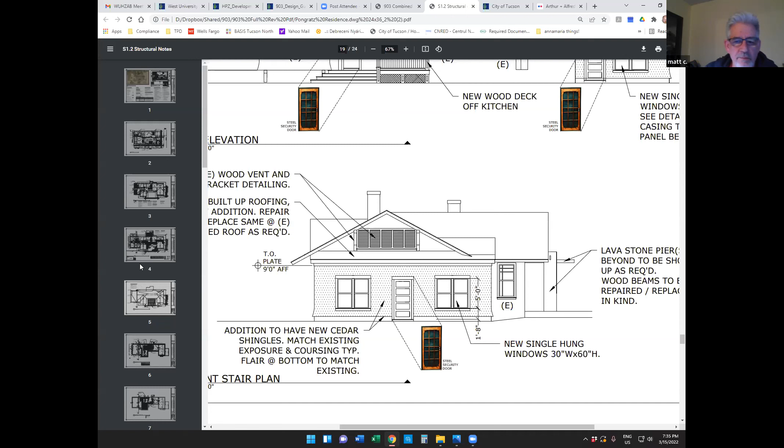We tried to work with the proportions of the windows so they'd be similar in their vertical dimension to the windows on the existing house. The detail will have a skirt board at the bottom of the sill, and casing around the windows, so that it's in kind to the way the existing windows have been cased on the existing house.

The roof of the addition will be built up. The existing roof on the sleeping porch is a built-up roof, and there's a portion of that roof which will remain - the gable end overhang is a very deep overhang. So essentially the seam between the roof for the addition and the existing roof is just slightly beyond the fascia board for that gable end.

I think we normally expect a little more information on the windows and doors that you're installing here, like maybe the spec sheet or something. Okay, Andy, do you have the spec sheet for those windows?

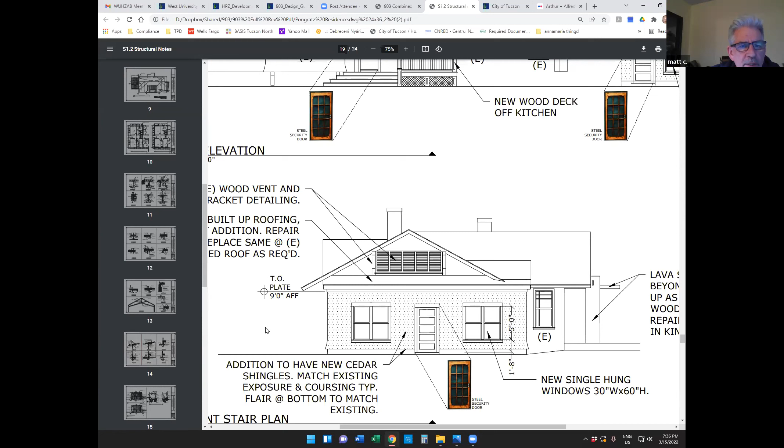The door is actually one of the existing doors in the house. We're just refurbishing a door to put in its place. Again, we're working with that same security door in that location.

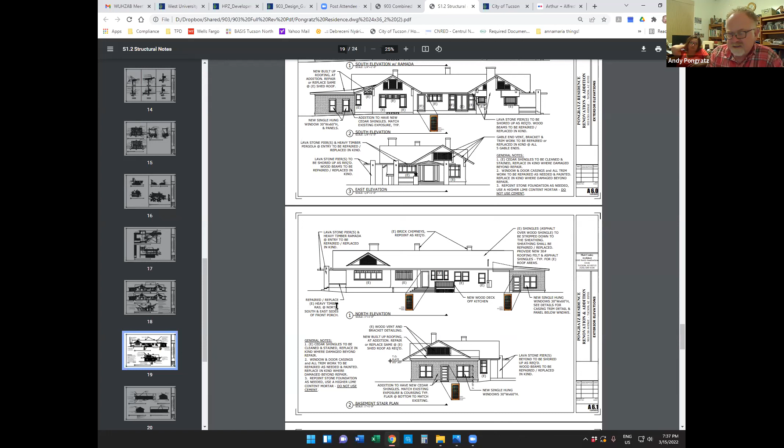So we're still finalizing exactly if it's Home Depot or Window Depot. Either way, it is the aluminum, and it's single hung. Matt, is it in the drawings anywhere? No.

I don't think I have a picture of it per se, but it's a standard single hung aluminum window, as plain as you can get it. We picked aluminum so we could actually go ahead and paint it yellow to match the trim of the house in succession with all the other windows in the whole house. That's why we're going with the aluminum.

And it's truly aluminum structure, the sash? Yes. Okay, I don't think we allow that. I think there is an aluminum clad wood window that we might consider on a case by case basis, but I believe, and I'll let anybody else interrupt me if I'm wrong, I believe we don't allow aluminum windows.

Damon, do you know who the manufacturer is of the clad window? Is that an Andersen window? We have allowed clad windows from companies like Andersen in the past.

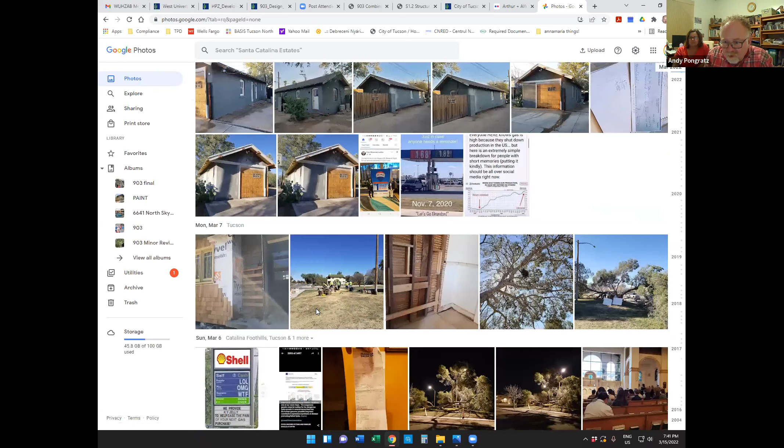Understand, yeah, I understand. But I just wanted to go ahead and show it's here in March... March 8th... March 5th, March, there it is.

Okay, so this is the window exactly, and it just seems to me that when we paint it, it's not just an aluminum - this is something that we can go ahead and be able to touch and be able to... No, it's not, guys. This isn't it. This is not it.

No, because they don't have them in stock. This is the vinyl, they just don't have them in stock.

I think, to be honest with you guys, Matt and Andy, because this is an addition, not an outbuilding, it's an addition to the contributing structure itself, we're gonna need a lot more information on the windows, and we're gonna have to probably have a conversation around whether solid aluminum windows are gonna be okay or not. They currently are not allowed in the guidelines. Clad, yes - if you went to Home Depot or Lowe's and looked at Andersen clad windows, we have allowed those.

Understood. And I'm kind of looking at the time here, we're gonna have to honor the 8 o'clock end of the meeting. So I'm trying to think about where else we can go to make sure you get approved what can be approved. But I think on this addition, with respect to the windows in particular, we're probably gonna have to come back to that. And frankly, I'll leave it up to the board too - I'm not 100% clear that I understand the roof line from the elevation pictures. If other members of the board get it, then I'm fine, I'm just kind of looking at it.

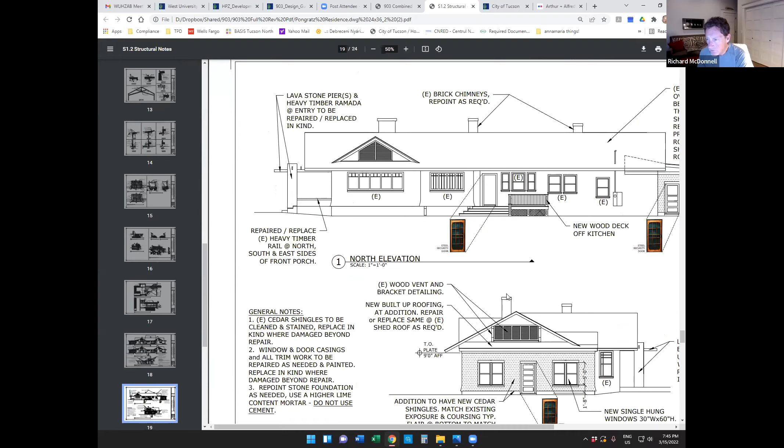I would say this is the existing here coming down, and then Darcy, from here over - I can't see where you're pointing, sorry. Oh, right there. Okay, yep, I can make it a little bit bigger. No, found it, I see it. So Andy, what Darcy's saying, what we're saying is, if you go back to the existing, the pitch on the existing is steeper

than what you're now proposing because you're extending the addition out quite a bit. And we all understand the math involved there, but it does mean that suddenly a built-up roof is your only option, right? It's probably - what I would say is you have to realize that a lot of this is even past here, this is actually part of - well, we're really close to the existing slope that's already there. I don't know if this is the exact pitch of what's there, but we're basically following the line, and then half of this area is what we're taking off.

Darcy, it's actually to grade right there. I think that's exactly how it is coming off, because we're talking about cutting into the existing porch to go ahead and build it back out, because it's just not feasible, it's in pieces. But the actual pitch line is probably exactly - we're actually going in to pull it off, and so that's the existing pitch right there, and I think that's exactly in line with what's there already.

Yeah, well, I guess my question is, it doesn't seem like it matches what I'm assuming to be that dashed line that's behind the roof, and for me personally, it just feels like a stretched roof, and it feels really like just a non-thought-out addition, only because the proportions of it are changing and the function's changing.

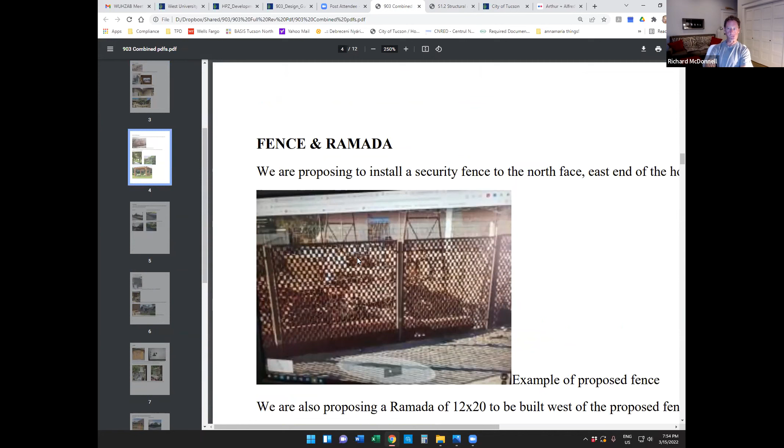For the Ramada, could we go to the site view on the drawing? Sure. Oh, got it.

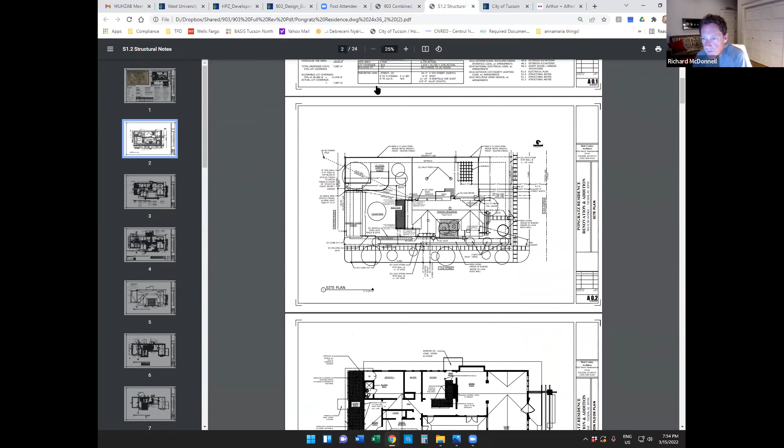Yeah, that one. So you're talking about a Ramada. It's on that particular sheet, right of center, right up there. Okay, correct, and it's just an open heavy timber Ramada. Andy's got a photograph of the style he'd like it to look like. So you've got 4 piers holding that thing up, posts that hold it up.

We're probably looking at 6, given the span, a 20-foot span. I understand.

But these aren't the drawings. Do you have an elevation view of the Ramada you're proposing? We haven't drawn that, no. Oh, you haven't drawn it? No. Okay.

Was the image you just showed the style you intend to emulate? Probably not as built up as this is, probably not that top piece, but definitely the sides here, which is what's going to support the whole thing.

Stylistically, it looks to me to be complementary to the house, so I think you're on the right track, at least in my opinion. But we would need to see more detail in order to approve or disapprove.

Matt, when you have an opportunity to draw it up, you can tell from the board we're all just wanting to make sure the construction complements other features of the house, the scale of it, the thickness of the wood and stuff. But putting a Ramada there, I think if this were a courtesy review, we'd be saying yeah, just keep the aesthetic the same.

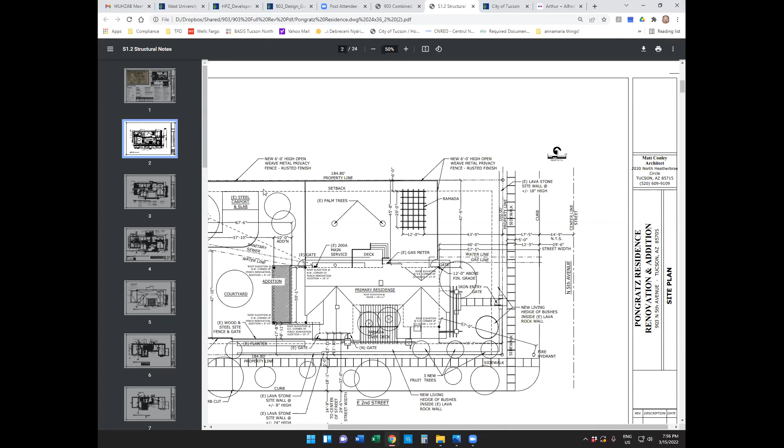Mr. Chair, if you're going to lose a quorum in the next 1 or 2 minutes, maybe think about taking some action before you lose quorum, because after that the meeting is over.

Yep, thank you, Michael, I appreciate that. So...

I'm not sure how to tie this off, so let me just talk this through a little bit. To approve the Ramada, we're going to need to see views of the Ramada, architectural drawings, elevation drawings of the design you're asking us to approve, which I know you understand.

On the addition, I think you heard our comments. The board is not yet completely on board with the approach you're taking exactly, so we're probably going to have to come back and look at that again after you've had an opportunity to really think about how that integrates with the house, the main contributing structure.

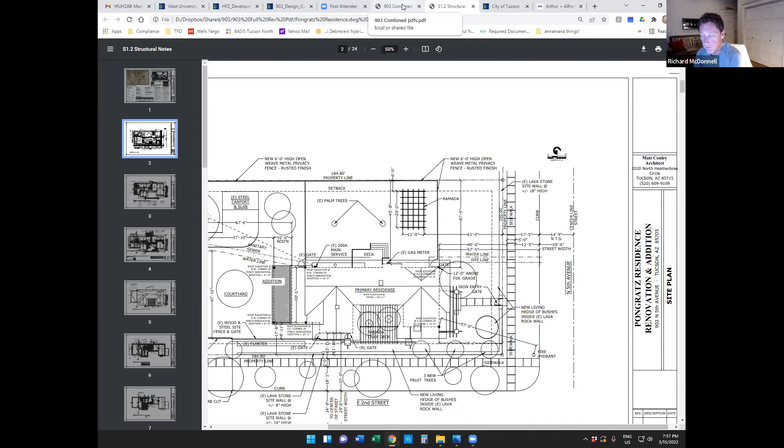You've heard a few comments from the board today on some things to think about. For that, if you want to come back for maybe a courtesy review with some ideas and concepts, that'd be fine. Same thing for the Ramada, although to Damon's point, that Ramada you're showing is perhaps on the right track.

We are out of time to do much more with the garage. I know that we approved 1 or 2 meetings ago the stuccoing of the garage. I'm not sure if there's anything else left on the garage to approve. The only other thing we have on the garage is the garage door.

I thought we got that approved, Matt. You weren't here, but we got that approved. Everything regarding the guest house garage has been approved. Okay, that's kind of the way I remember it as well.

So am I correct on the Ramada and the north patio, there's stuff you've already got actions on. The Ramada, we need to see more specific information on, and the board is not yet comfortable with where you're architecturally going with the back patio and the west addition. Based on our comments, you'll probably need to see that again.

Also include the sheet for all the materials that you're using. The spec sheet, yes, we need spec sheets on whatever you're going to do for the windows. But bear in mind, to the point Damon brought up, all aluminum windows are currently not allowed by the design guides. Aluminum clad or metal clad windows are. And we all know that companies like Andersen, and others, do make those.

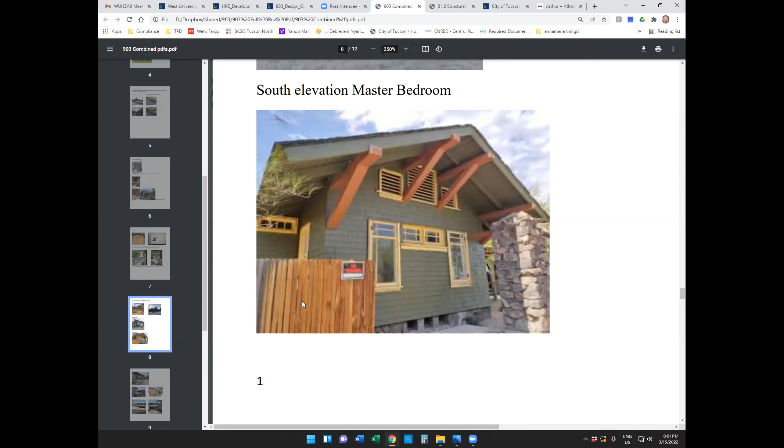I think I would just say, to summarize our concern on what was the sleeping porch: it's not really just enclosing a porch now, it's becoming an addition. So it should really be treated as an addition and not just the enclosing of a sleeping porch, with its proportions and everything else. As we mentioned before, the design guidelines have you go through this exercise of talking about the rhythm, the materials, the pattern, the heights, and all of those things. So if you spend the time to write out that design narrative the HPZ is requiring, it makes you answer all those questions before you get to the meeting.

Understood. Okay, so given all that, we need to move on and close out the agenda.

Oh shoot, Darcy, are you already gone? I'm here, but I need to go. Oh, I know, Darcy needs to go.

So let's just close the meeting now, and the rest of the items we'll put in the next meeting. I'm fine with that. I know Darcy needs to go.

All right, with that, Michael, do we need someone to propose a motion to close out the meeting and postpone all remaining items for next time?

I second Michelle's motion. All right, we have a motion, we have a second. Darcy, how do you vote? Aye. Damon, how do you vote? Aye. Betsy, are you still on the board? How do you vote? Aye. Rachel, how do you vote? Aye. This is Rick, I vote aye.

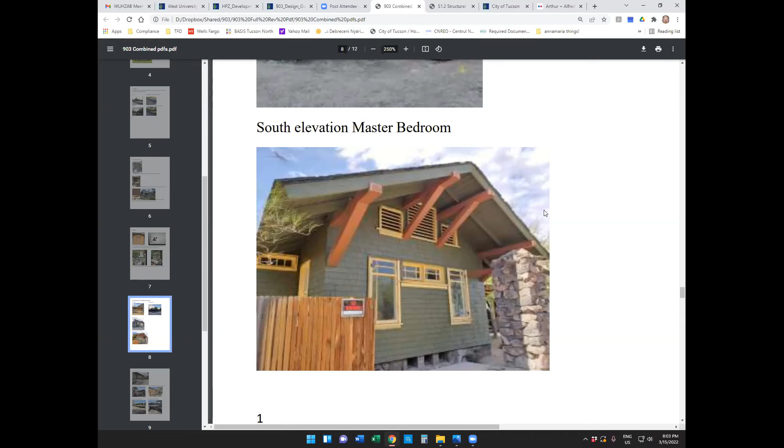Michael, do you have the share screen now before I leave? Yeah, I do. Okay, just wanted to make sure before I left you guys. All right, we all set? Thank you.